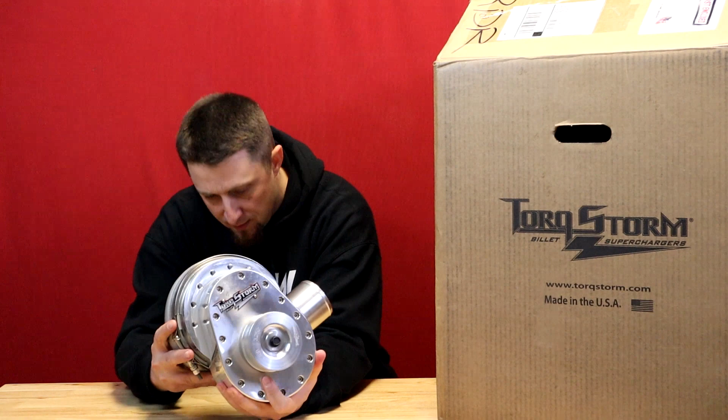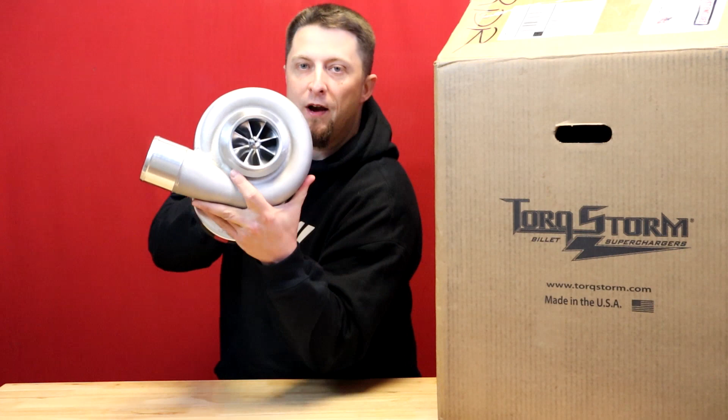Man, that thing looks so nice. Oh man, I don't even want to breathe on it. It looks so pretty. Torqstorm, baby. Oh my God, the machining on this thing is absolutely crazy. Holy moly. The billet natural finish is just, I don't even know what to say besides it is absolutely just amazing looking.

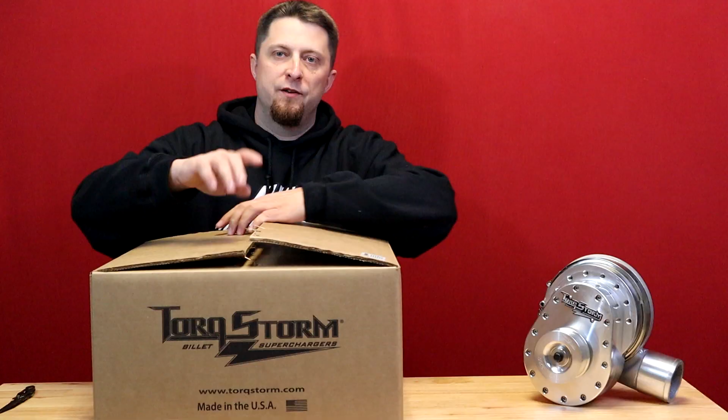A little bit of a snail right there. Oh yes, oh man, check that out. I'll get a close-up of this thing real quick here in a second, guys. But they actually have the American flag with a plate stamped onto the casing. It says, proudly made in the USA. That is hot damn badass.

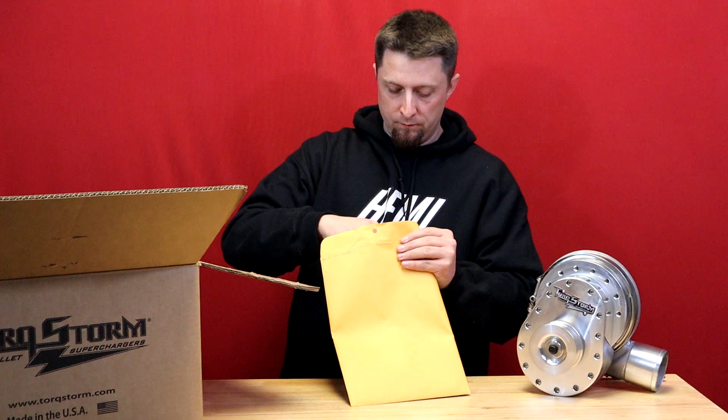That is awesome, sorry I had to kind of cut that section out. To get this other box out of the bottom of that box was kind of a pain. I had to put the whole thing on the ground so I could pull it out. But anywho, here we go. I already busted open the staples pulling it out, so it's pretty much open for us already. The second box was actually heavier. Believe it or not, I believe it's going to have all of our brackets and pulleys and other hardware. So let's check it out.

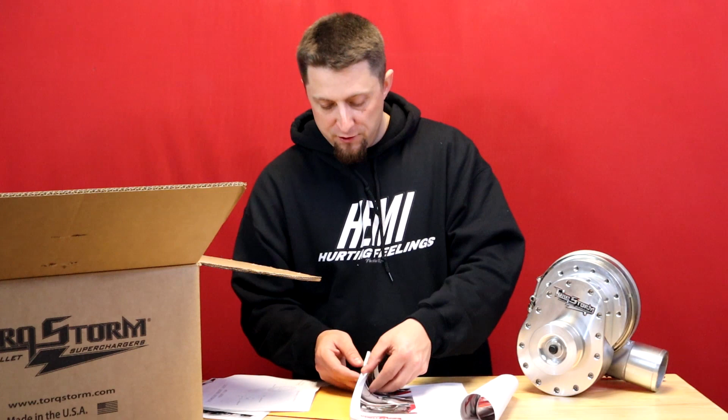Alright, so it looks like the first thing on top of this box is going to be an envelope. And this looks like it's going to be instructions. This is going to be the book of the actual instructions.

The first page says step 1. And these are actually super awesome, like these are colored pictures, guys. Absolutely amazing, these instructions are super sick. Very, very nice instructions. Colored pictures, step by step. This is gonna make this install even easier than I thought. So props and kudos to Torqstorm for taking the time to make such amazing instructions. Again, when I get the other camera over here, we're going to do a close-up of everything and I will show you some of the pictures on those instructions.

Alright, so the next thing out of the box is going to be, looks like the crank, one of the lower crank pulleys. This is also made out of billet. And that is just super badass. Super nice, not super heavy. I mean, the quality on the machining that these guys do is amazing.

Again, they make all of their own stuff in-house. They make the pulleys, the supercharger, the whole thing is made in their facility in the USA. And man, the quality, I can't even, it don't even do it justice. As soon as I get the camera over here to do some close-ups on what this stuff really looks like, guys, it is amazing. Like, this is super quality.

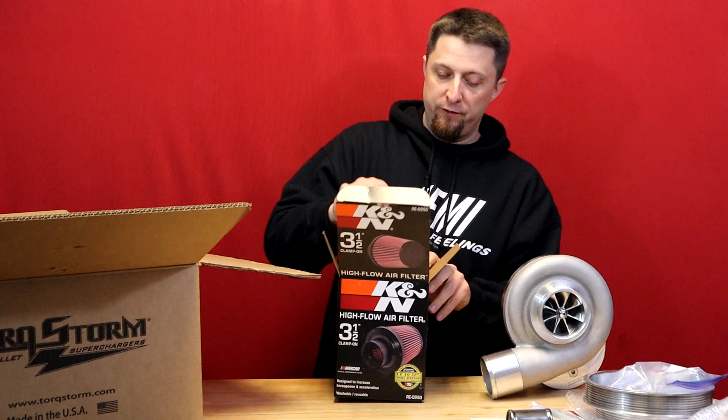Next thing out of the box, nothing too crazy here. This is a hose connector. I'm not going to rip it out of the package, but looks like it's a hose connector for probably something to do with the radiator hoses or something like that.

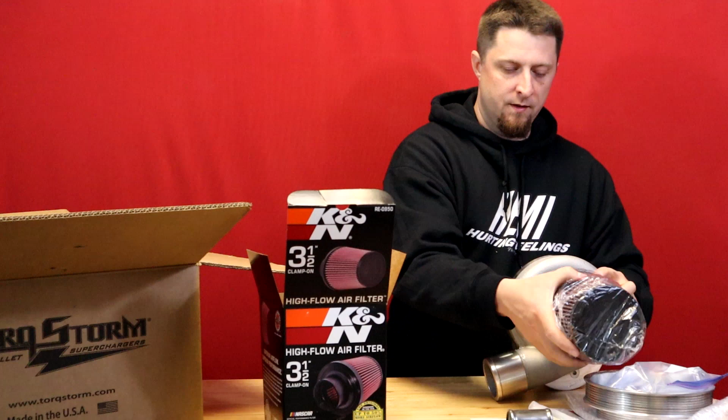Oh man, that's awesome. I didn't even realize it was going to come with that. A K&N cone air filter, which is going to go right onto the inlet side of the supercharger. So that will literally go right on the end there.

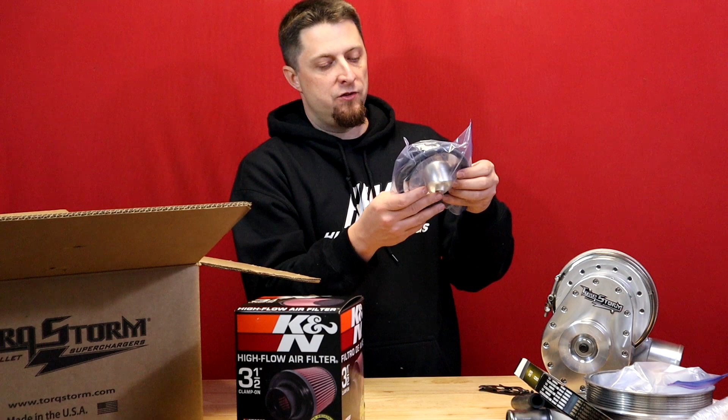So you don't even have to buy an air filter. Super stoked on that, K&N. She's going to be styling and profiling, baby. So there's one less thing that you got to find. Air filter is set up for you already.

Let's see. Nothing too crazy there. Looks like some rubber hosing.

Supercharger belt. And again, this is an 8-rib belt, a Dayco belt. So that's a super nice belt right there.

And looks like this is going to be some more tubing and some sort of a flange in here and a clamp. Not sure what that's going to be for, but I'm sure we're going to need it.

And this looks like some radiator hose. This is actually the thermostat housing right here. Not sure why, but they supply you with a thermostat housing and a couple hose clamps and some hardware in here also.

Next thing out of the box, those are some spacers that they machined, and you can tell that they made these things as well. This is the same material out of the supercharger, billet material, very nice looking, very polished, looks really nice. So those are some spacers, which I'm sure has probably something to do with the big bracket for this thing.

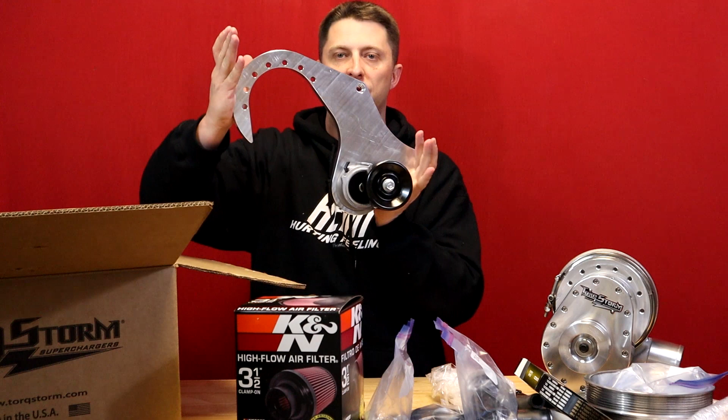Holy moly, look at the shine on that. Very, very thick. Again, another part that they build, and the quality is amazing. The threads, I mean, it is a phenomenal job of the machining that has went into this kit.

And this guy looks like it's going to be the main bracket. I don't know if the camera's doing justice on the shine and the appearance of this thing. I mean, look how thick it is. That is super strong. And again, the quality of the machining, superb.

This is going to be one of the main brackets. This looks like the tensioner pulley assembly, which is already mounted to the bracket with a pulley on it.

Next thing out of the box, this says it's a balancer install kit for the Hemi. Let's see what's in this guy. Looks like we got some hardware. It's just looks like a big threaded rod with a big washer and a nut.

And another box here. Let's see what's in here. Oh, I bet you I know what this is. I got money, it says this is a blow-off valve. Yep. Good night, that thing is huge. Man, I've seen videos and pictures of these things on some of the videos I've watched, but it does not do it justice. This blow-off valve is massive.

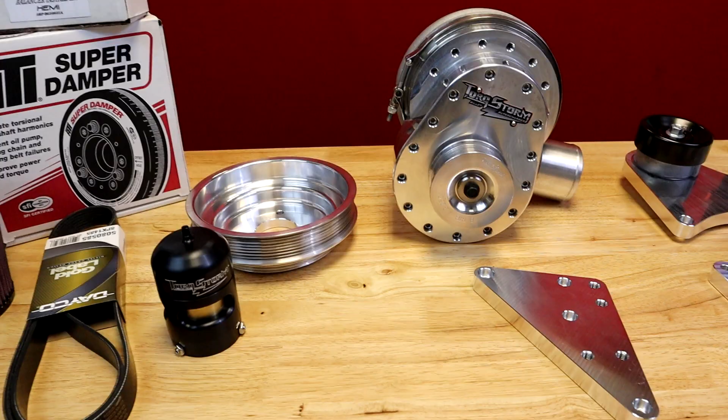I'm not going to take this completely out, guys. It looks like there's a lot of stuff in here. There's some pulleys. Looks like a hub and some hardware.

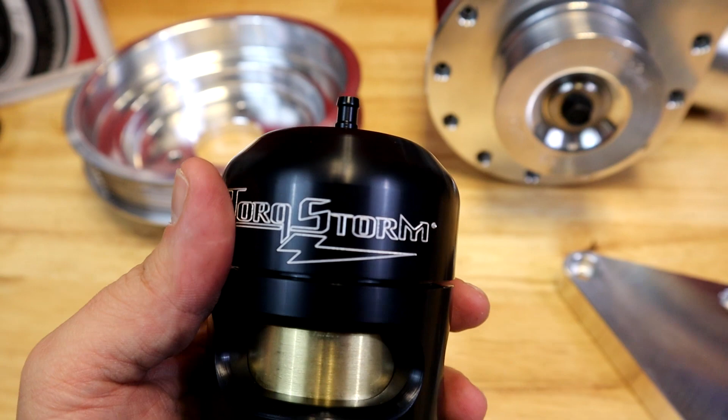So I am super stoked on this Torqstorm Supercharger kit. I'm going to lay everything out here real nice, and I'm going to get the camera over here and zoom in on this stuff so you can see the real quality of what we're looking at right here. This is super, this is amazing. Like the quality and what I'm seeing right here, I'm super stoked. I can't wait to get this thing on the truck.

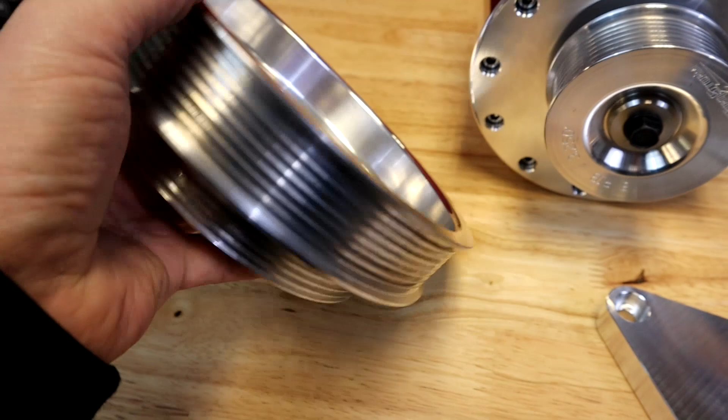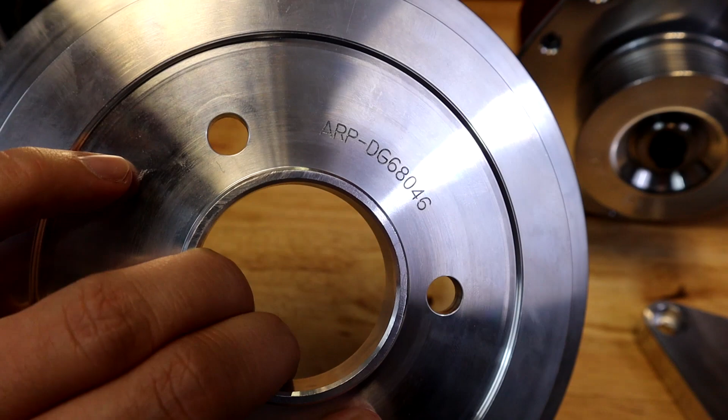Alright guys, so we're going to zoom in on some of these pieces. And the first thing I want to show you guys is the blow-off valve. I mean, this thing is huge. Just look at that.

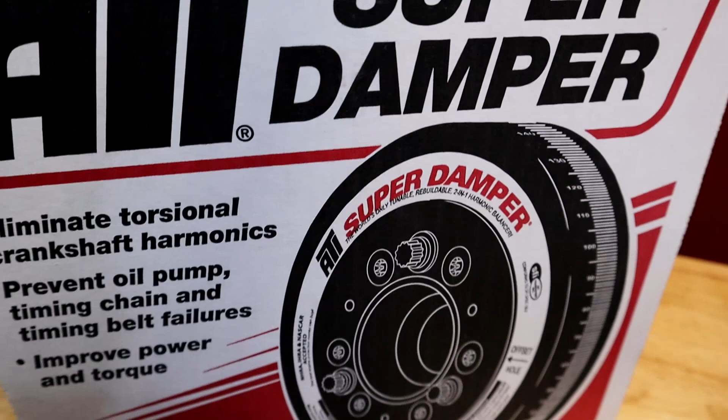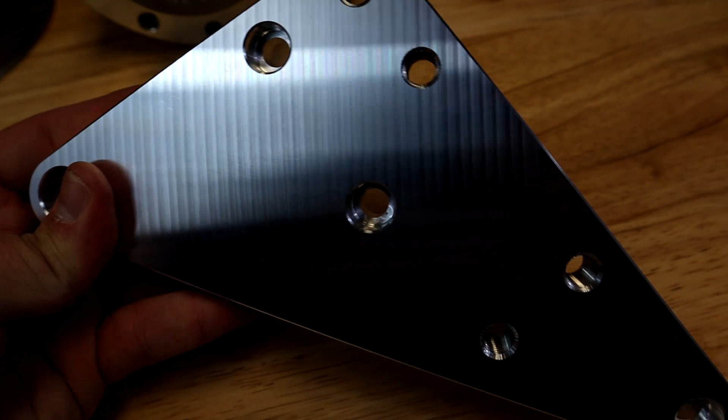Quality is insanely very, very good. They build that big lower pulley. This is another part they make. Look at the quality on this machining that they do, guys. Part numbers on every single piece. Every part I have touched has a part number engraved in it.

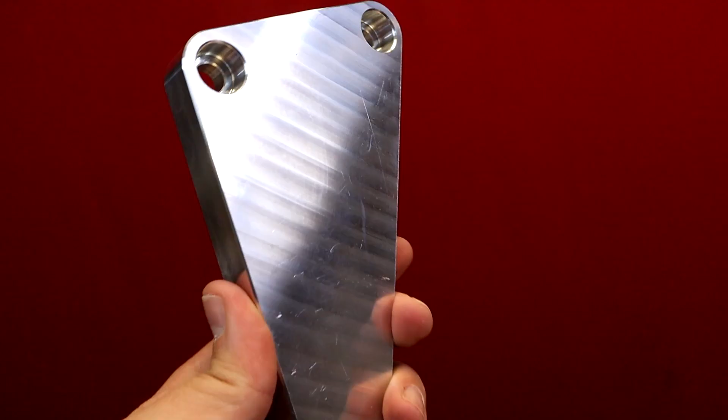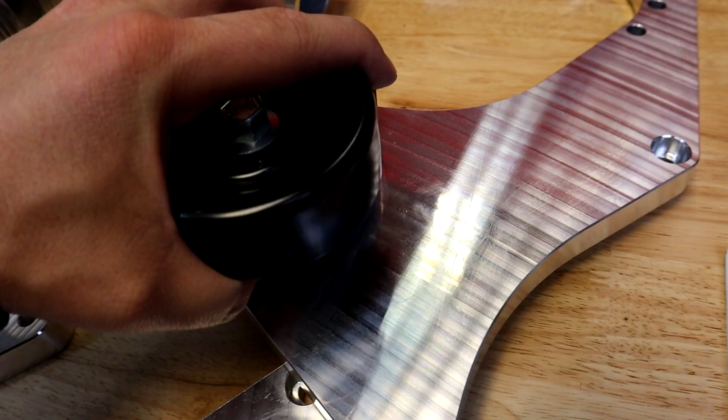That's the balancer kit that it came with. That is the ATI Super Damper kit that it comes with. The K&N filter included in the kit.

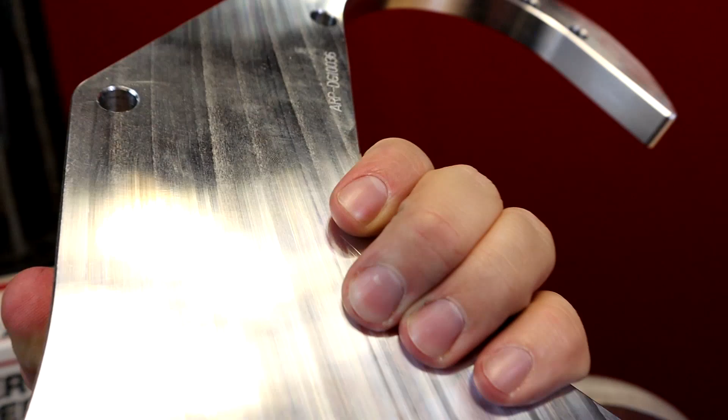Some more brackets, and again, just look at the machining. Everything shines, everything is nice and smooth. It is amazing, and again, part numbers on every piece. Another bracket right here. Again, quality. Super nice, look how thick this stuff is.

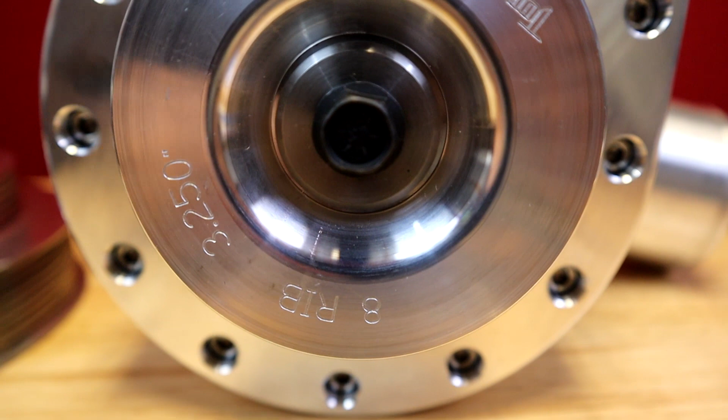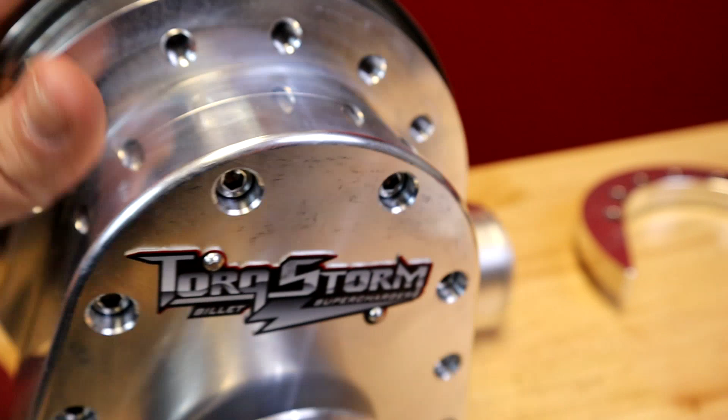With the tensioner assembly, tensioner's already mounted to this bracket. Again, quality, super thick. Part number on everything.

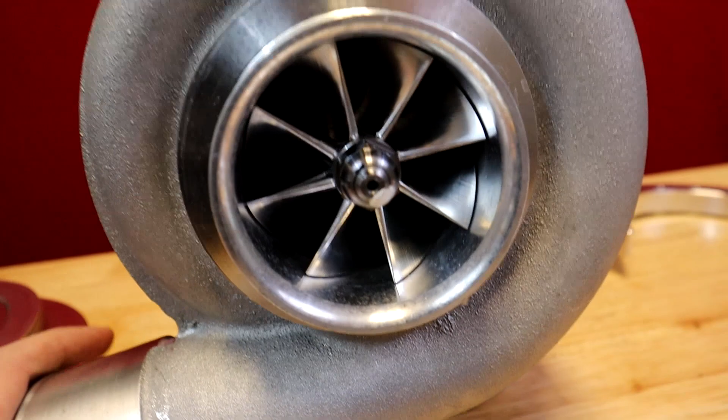And of course, the important part, right? I mean, TorqStorm is even on the pulley. The size of the pulley, 8 rib. Again, 8 rib kit. ProCharger comes with a 6 rib kit.

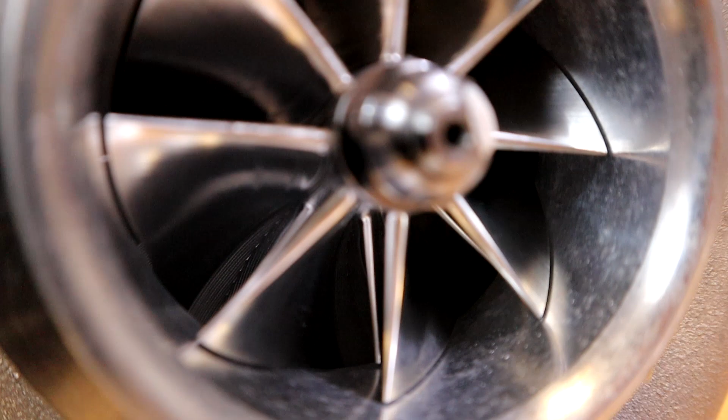Super good job on this, guys. Machining, again, I mean, I know I keep mentioning the machining and the quality, but I mean, look, it speaks for itself. Look at this stuff.

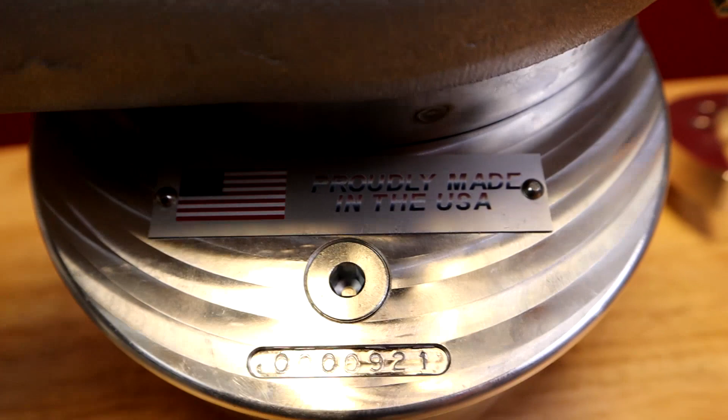This is the way it comes. This is not an upgrade to get a polished looking supercharger. This comes like this, straight from them. No upgrades necessary, that is what you're going to get.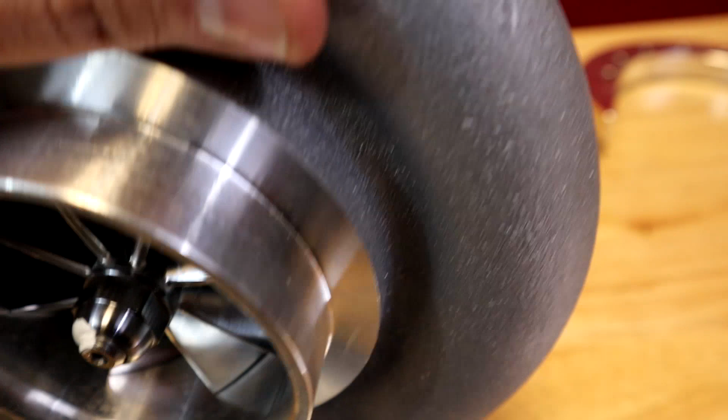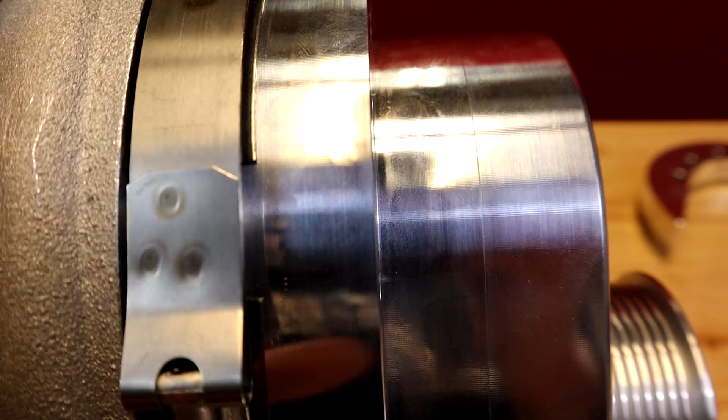And we all know that's, you know, the whirly wheel right there. They make everything. They make everything inside this supercharger. The impeller, the shaft, the housing, the whole nine. And again, see if I can show you guys this, stamped on the case, proudly made in the USA. That is hot damn badass.

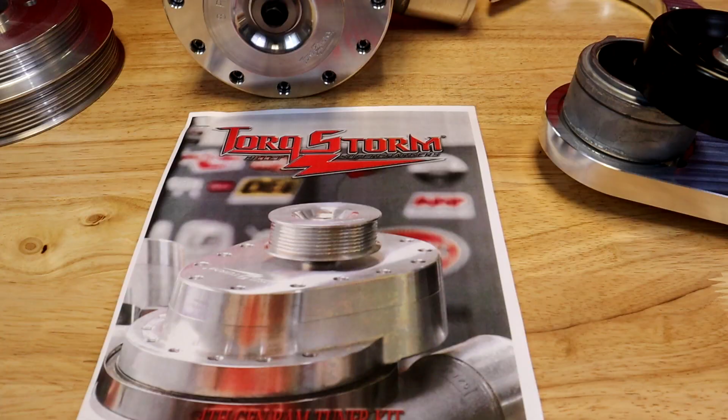And the other thing I want to mention, guys, a lot of people don't know, but this supercharger is clamped. It's got a big clamp here to where you can actually clock this thing one way or the other. So if you need to clock it to get your inlet or outlet one way or the other, you can actually rotate this assembly and do that. Very nice feature with the TorqStorm. Very universal.

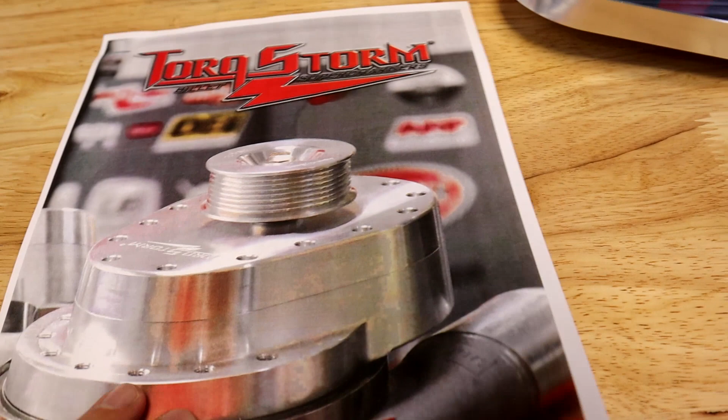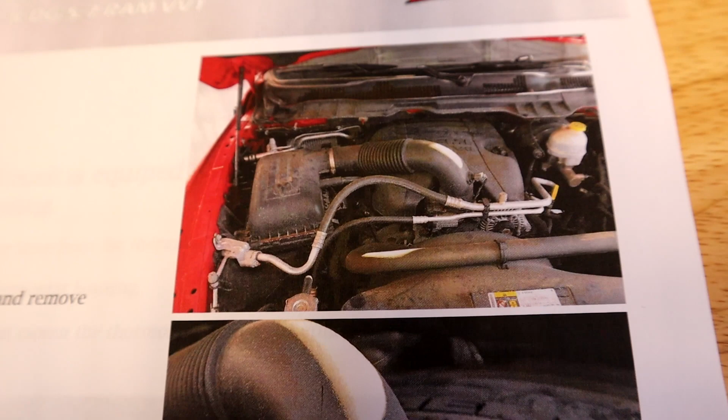I mean, in my book, guys, that's a home run. The money you're paying for this is not no eBay budget cheap crap supercharger. This is 100% quality made, 100% quality materials going into this stuff. And this is built by people that actually care about what they're sending their customers, guys. TorqStorm nailed this one.

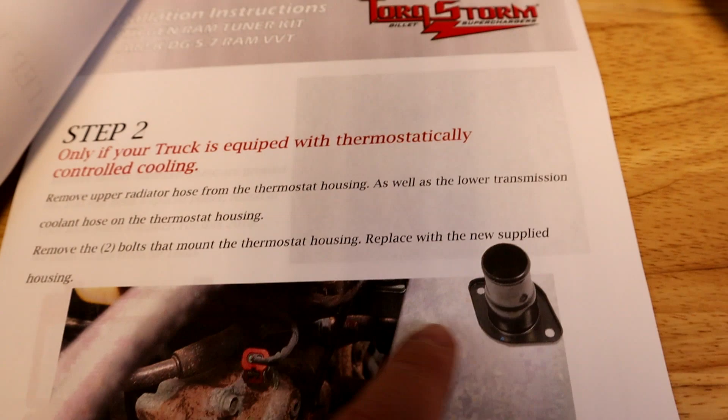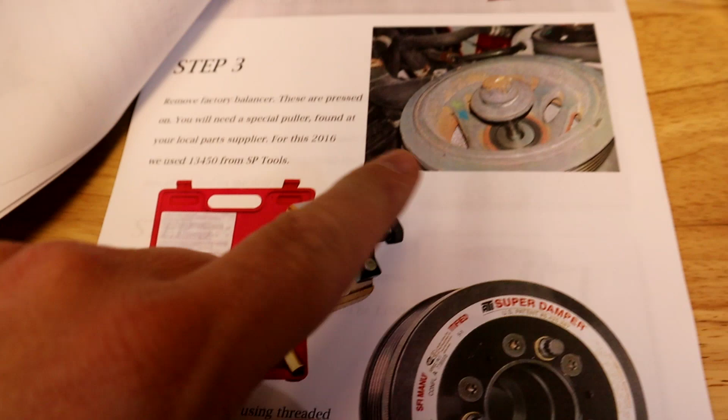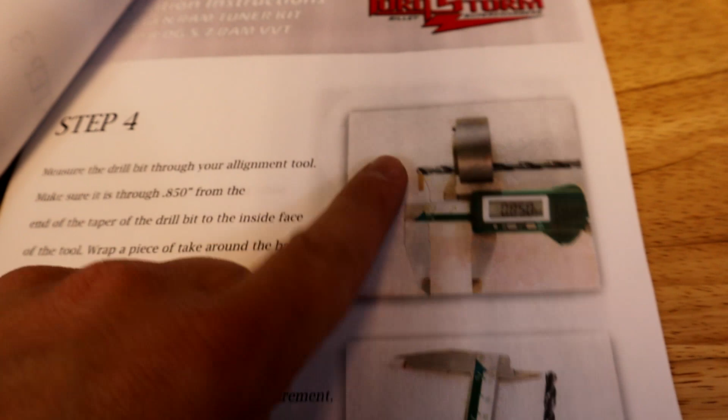Alright, the other thing I want to show you, here's the book they sent, the instruction book. 4th gen RAM tuner kit instructions, part number on the book. And this is what we got, this is what you get. Step 1, pictures that's actually in color of the actual vehicle that you're working on. I mean, it cannot get any easier than this, guys.

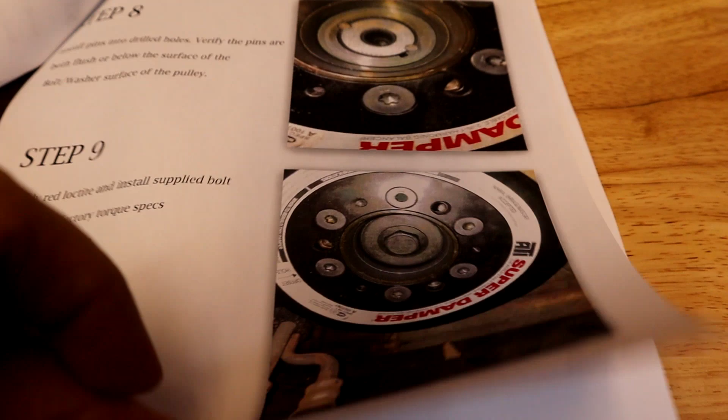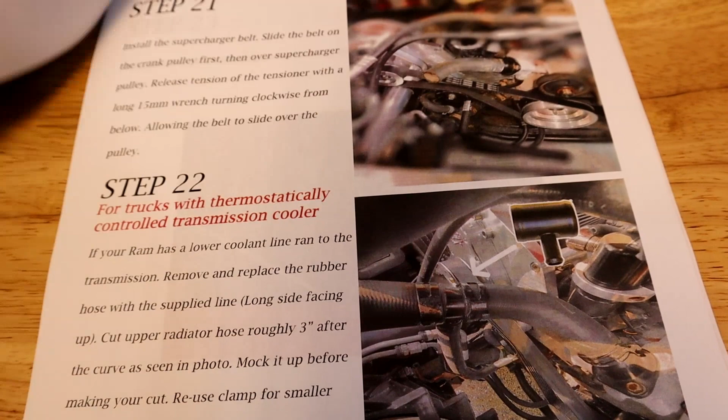Let's go to page 2. Page 2, another quality picture with the part they're wanting you to install, how to do it. Page 3, look, they even suggest tools that you may need to use to get this old pulley off to install the new pulley, with color pictures.

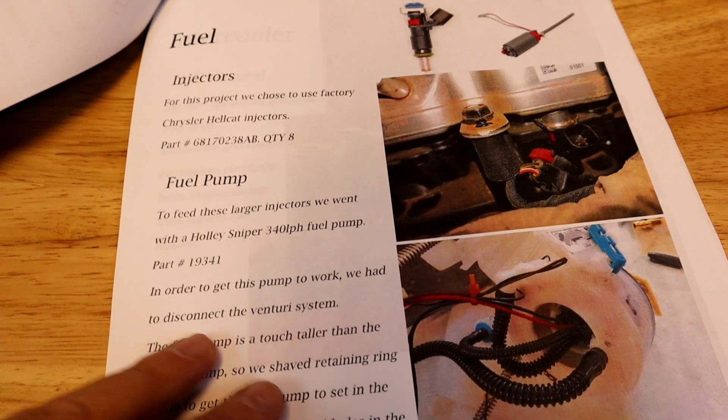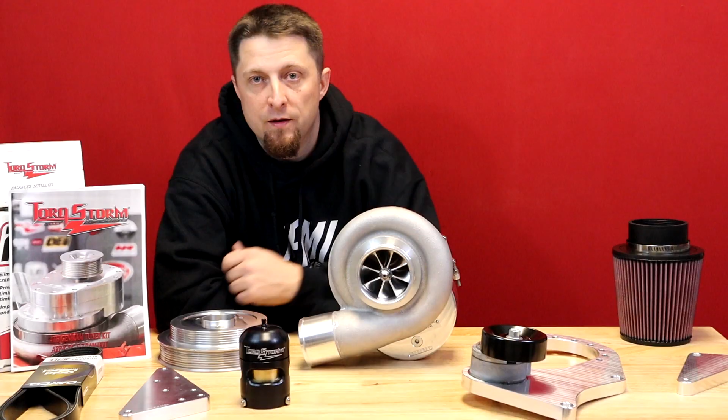Step 4, this is talking about pinning the crank, how to do it with colored pictures. I mean, this is super nice. They really spent some time on making these instructions, guys.

I know I'm kind of whipping through them, but the battery is about to die, and I just want to let you guys see it. I mean, there you go.

So, you buy a TorqStorm Supercharger, I mean, you're not just buying a handshake and a smile, guys. You're going to buy a kit that's going to fit what you're putting it on. It's going to come with instructions of what you need to do to get it on there. So, again, thumbs up TorqStorm. You guys rock, and I can't wait to get this thing on.

So there you go, guys. TorqStorm Supercharger kit, that's what's included. And as you can see, guys, this is quality stuff. This is not garbage. Very, very, very great quality, and lots of craftsmanship goes into this kit, and that is without question. So I think that's going to do it for the video today, guys.

I'm super stoked and excited to get this thing mounted on the truck. Lots of videos to come. We're going to get this thing installed. We're going to have install videos coming up.